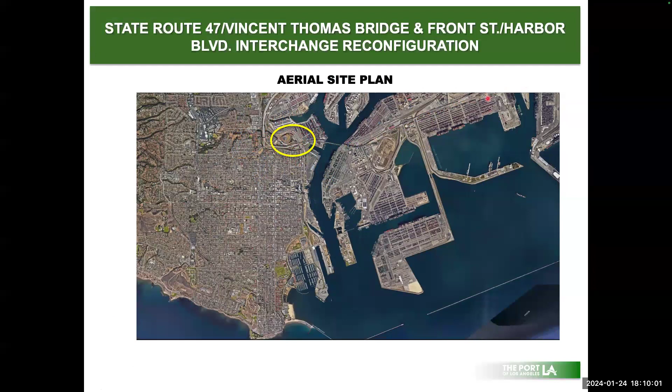So here is an aerial site plan. Let me just get my laser pointer on the project location with respect to the port complex. So just really, a 50,000-foot bird's eye view. We have the interchange here at Harbor Boulevard. This is the SR 47 that goes across to Long Beach in this area. And then we have San Pedro over here to the south.

Just to touch on some high-level improvements, as I'm sure those familiar with this interchange know, we have a lot of sight distance issues as you're coming off from Long Beach at the Harbor Boulevard exit to San Pedro. As you're coming off that off-ramp, it's kind of hard to see if vehicles are backed up. It's a quick merge as you're coming off the freeway with truck traffic coming off the 110 freeway.

So this project is essentially proposing to flip that ramp from the south side of the bridge to the north side. We'll now have a new off-ramp coming from Long Beach that'll exit on Front Street. It's a little hard to see, but we have a dual right turn, so we'll have two right turns coming off for commercial and waterfront traffic. And then we'll actually be introducing a direct exit into the West Basin Container Terminal, essentially separating truck and vehicular traffic just to add some more safety and eliminate traffic congestion in the area. So that's kind of the main improvement.

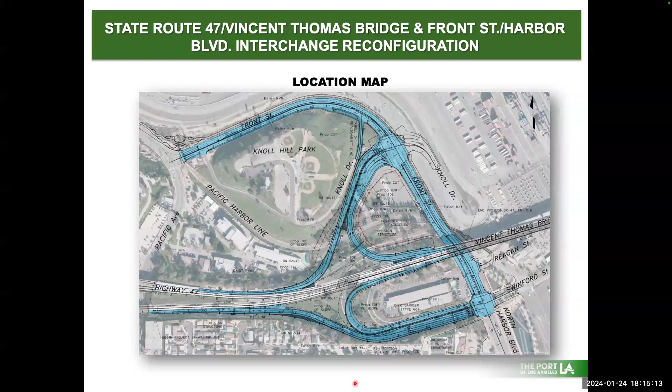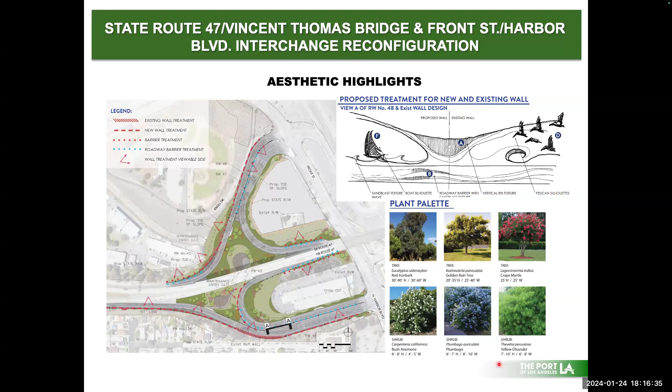And then the port will be responsible to maintain that landscape for 3 years post-construction, for plant establishment. And so now I just want to get into construction phasing.

I'm going to talk high level, just going over the 5 or 6 different stages of construction that we have. I want to emphasize the port understands the community's concerns regarding traffic detours. We plan to notify all truckers, ILWU members, community members, etc., prior to implementation of every single phase. We'll have a dedicated PR and community outreach team during construction as well.

I also want to highlight that Skanska, the contractor awarded this project, will receive their notice to proceed in March. At that time we'll have a more concrete construction schedule with more accurate dates and durations for each stage. The timeline I'm presenting today is based on our engineer's estimate that was part of design. It shouldn't differ too much, but once we have that construction schedule, we can give you some actuals in terms of timeline.

So stage 0, we anticipate this will start in spring of 2024, just in the next couple of months. There's no improvements happening to the freeway system. We do anticipate a weekend closure or two at Front and Pacific.

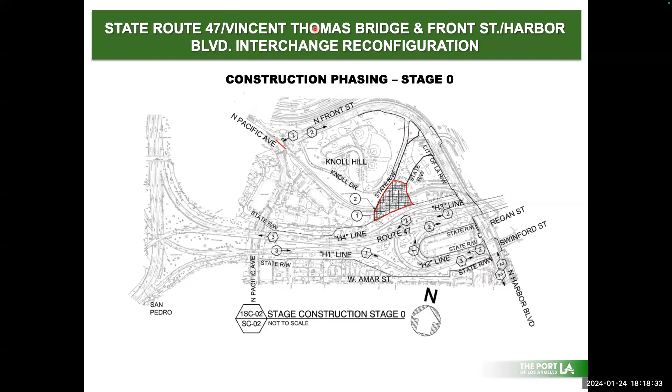And then we will switch, so the closure will be on the inside lanes while the outside lanes are available for traffic. We do anticipate some nighttime closures. We don't have those dates locked down yet, but we'll keep everybody informed.

We do anticipate a closure to a portion of Knoll Drive. We will still maintain access at all times to Knoll Hill, however we'll just be converting Knoll Drive into a 2-way traffic operation with flaggers for safety reasons. No closures to the freeway system during this stage.

Moving on to stage 2A, at this point all of the improvements north of the Vincent Thomas Bridge on Front Street are complete, including curb and gutter, street overlay, signals, street lighting, etc. So we'll see a similar traffic pattern south of the Vincent Thomas Bridge.

Closure of the outside lanes while we do construction, and we'll maintain 1 lane in each direction for the inside lanes, then we'll be switching. The same thing is happening on Swinford Street.

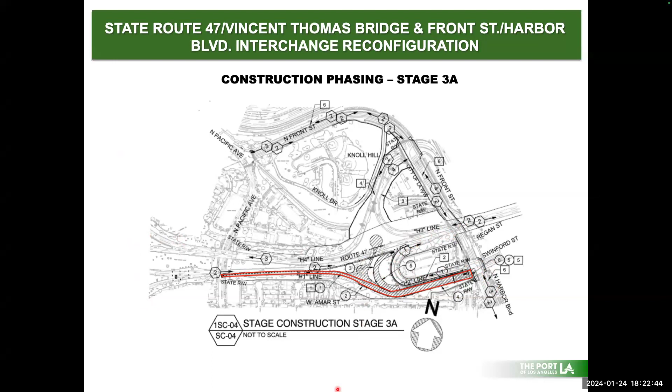I don't think I mentioned yet, but this stage will occur during winter of 2025 to spring of 2026. So late '25 to '26.

And then in summer of 2026, our last stage, 3B, we are anticipating a closure of the Harbor Boulevard on-ramp. So from San Pedro to Long Beach, again, detouring vehicles to Channel and Gaffey Street, and no other closures to the freeway system. This should be just a couple of months for this closure as well.

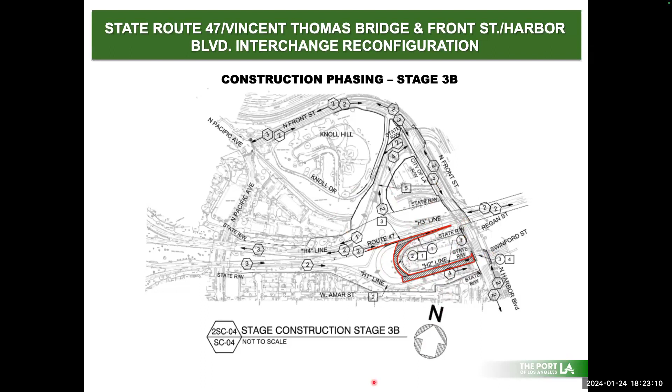So just to give some other project facts, this project is in conjunction with Caltrans, as well as several City of LA departments. We have approximately 73 million in total project grant funds, all the way from the regional to federal levels. This project was advertised July 13th.

Construction is scheduled to begin March 4th, and we'll really break ground a little bit shortly after that. This is when our construction NTP is issued, and then we have about a 3-year construction duration.

So we have conducted community outreach throughout the planning, environmental, and design phases, and we have every intention to continue doing so and ramp it up during construction as well.

We're committed to providing as much transparency and communication for the upcoming closures, as we know this impacts the local communities. We do have our partnering session with our contractor on February 21st, at which time we'll determine a groundbreaking date and go ahead and notify the community as well.

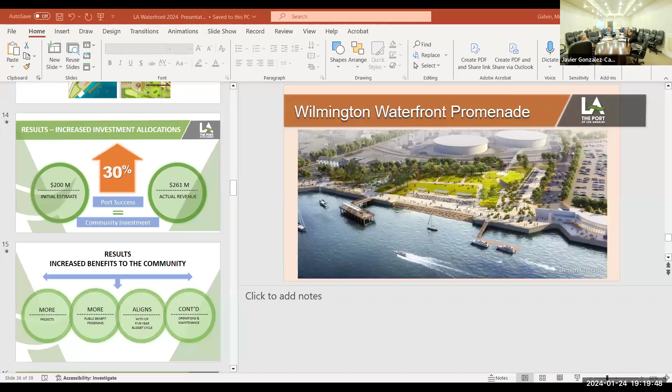So I'm gonna do LA waterfront first. I'll buzz through this, and then there's PIP in this too, but I'll go as fast as I can. I talk really fast if I need to. Whoops, got to change the cover slide.

So everybody knows what the LA waterfront is, right? This is the core of what the PIP is trying to invest in: this 450 acres and 8 miles of waterfront between Wilmington and San Pedro. There's a lot going on there, a lot of information here.

Cruise passengers are up. We have good stats on recreational vessel slips, public events, and marina access. We've done a lot of studying over the years on the LA waterfront from the Urban Land Institute, both in San Pedro and Wilmington. I think the connectivity plan in San Pedro does a really good job of looking into the entirety of the studies we've done. There are probably over 20 studies done over the last two decades looking at planning out the waterfront.

In the Port of LA, we organizationally changed how we deal with waterfront development in 2015 by creating the Waterfront and Commercial Real Estate Division, which I'm in charge of, and infrastructure investment through the Public Access Investment Plan, an event policy, waterfront commercial leasing guidelines, and the revised public access investment plan and the connectivity plan that came after that.

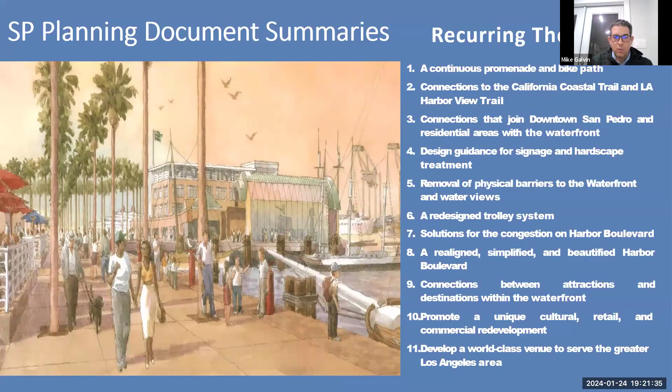So we learned a bunch of things in regards to the waterfront over the course of time with all of these studies. The focus is really on connecting downtown to the waterfront, connecting the waterfront amenities to each other, making sure it all works together. There's a lot of difficulties in developing the waterfront.

I won't go into all this, but it's probably one of the most difficult places to develop in the state of California, just with all the regulatory overlap between State Lands Commission, Coastal Commission, city, port, and different land use mixes. So we have a history of unsuccessfully privately funded projects, but we're turning the corner on that.

We're much better at what we're doing now. We understand, the port understands its position in the waterfront, and we have been at it marketing this new approach for almost 10 years. We have good success through building infrastructure, activating the waterfront, and attracting visitors and private investment.

It started with the PAIP, which I already went through: a 10-year budgetary guideline, 10% of operating income, and community input that we received. It's resulted, total of that and past development, in about $1 billion of investment since about 2004.

It's really critical to make this all work that we have private investment. So we have to furnish our leasing policies around that and understand the development life cycles. We all saw what happened with Ports of Call. That was a failure of understanding how the development needed to be reinvested in, and how the private and public agency could work with each other to make that happen. I think we've learned a lot of lessons from that, and as a result, need to proactively address market decline.

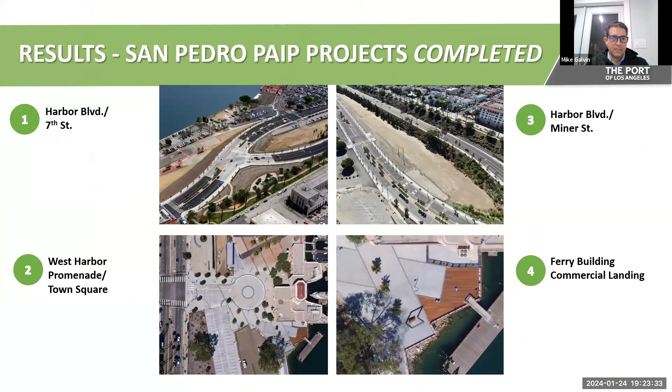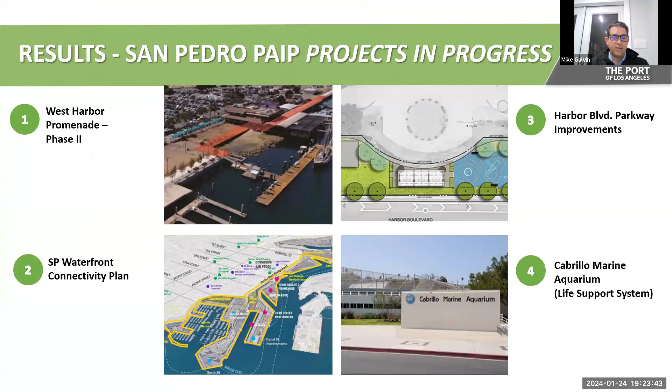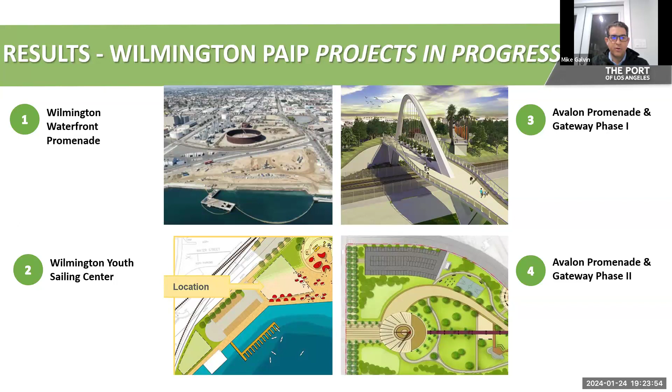So that was a big success, and it was built on the back of all of these great results that came out of PAIP. These are all projects that have been completed or are in the process of being completed as we speak now. Phase 2 of West Harbor is actively being worked forward, and the Wilmington Waterfront Promenade, Wilmington's re-access to the waterfront, will open on February 3rd, which will be a really big moment for Wilmington, getting access back to the waterfront after a century, basically.

So the public access investment plan was very successful. Started out expecting $200 million in total investment, and the results are about $261 million now, actually. So we're about 30% up from where we originally projected in 2015.

So the success of our overall business translates into success for the community. And what we get out of that is more projects, more public benefit programs, better alignment internally. So now the permanent fixture of the PAIP will line up with our 5-year budget cycle for planning capital projects, which is really important, because it is no longer a 10-year cycle. It is an ongoing program. The port will continue moving forward.

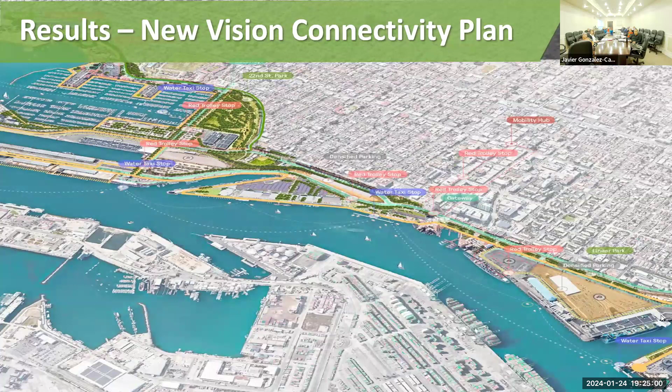And we have a new vision in San Pedro with the connectivity plan that, for those of you that have not read it, it's hard. It's 500 pages, but there are a lot of pictures. So I encourage you all to do that. There's a lot of good information in there. We have not seen this comprehensive of a deep dive into everything we've done and need to do ever. And we got really, really good value out of this.

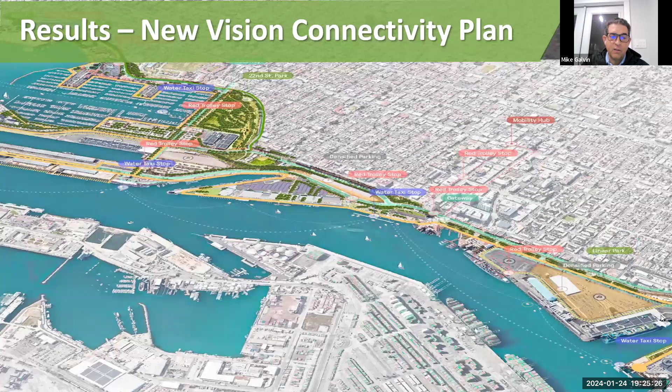I think the total that we spent was about $540,000. And I don't know how they did it for that price. Quite honestly, they did this for us because they gave us millions and millions of dollars of value through what they did. So hats off to SWA, and to those that chose them. I think some of those people are in this room and participated in the selection process. So I thank you all for making the right decision.

We have this development plan now along the San Pedro waterfront that we've been working on well before the connectivity plan, but it includes the West Harbor project, which is sort of central to everything we're doing, and AltaSea's project, which is essential as well. These are both projects that have been under lease for a long period of time, and the port has been working on delivering them along with our private partners there, and are having good success on both of those.

We have crafted the existing development there. That was really one of the first large-scale developments in the port that wasn't just a standalone commercial asset like the hotel that we have, or 22nd Street Landing.

And then we have new projects coming to market now that we've negotiated through RFPs with Cabrillo Way Marina. That one is hopefully closing this year. We're pretty close to getting to agreement on base terms for the lease there. The boat repair facility, which NOP was out, I think it was last week for that. So that's the beginning of the EIR process there. Warehouse One, we hope to start that request for information process to get the solicitation for a new developer there this year in the next 6 months.

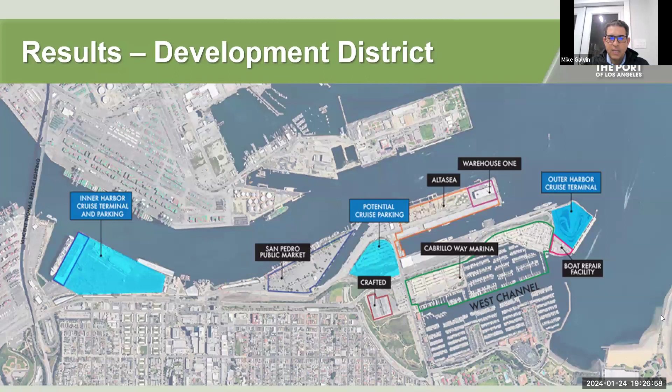And then the cruise terminal, and we're going to go into a little more detail on the cruise terminal in the next presentation. So the results of all of this is we get leveraged development. Like I said, we have a $165 million project that's being built here.

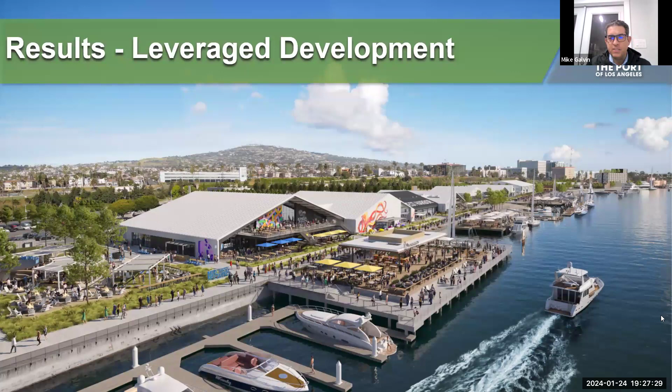$150 million of that is coming from outside financing, which doesn't happen without a good partnership, the right leasing policies, and understanding from both sides that the port is going to act correctly moving forward in accordance with our new leasing guidelines. All of these pieces were necessary, and we've been working on this for about 10 years to make sure we're in a good place to deliver.

These are the phases we talked about: phase 1A and 1B. 1A is under construction now, and that's what you see out there when you go to the site. 1B will be under construction the next couple months. 1B is adjacent to the majority of the phase 2 section of the promenade, which is where the San Pedro Fish Market used to be. Phase 1C, I think, is going to be a standalone building, probably for the fish market at this point.

Then you have North Park further to the north, which is a larger format recreation area with all types of uses. I think there's a Pig and Pickle, which is a pickleball facility with food and beverage associated with it. Park Social is a dog park that also has food and beverage, and that's all adjacent to the largest courtesy dock in Southern California.

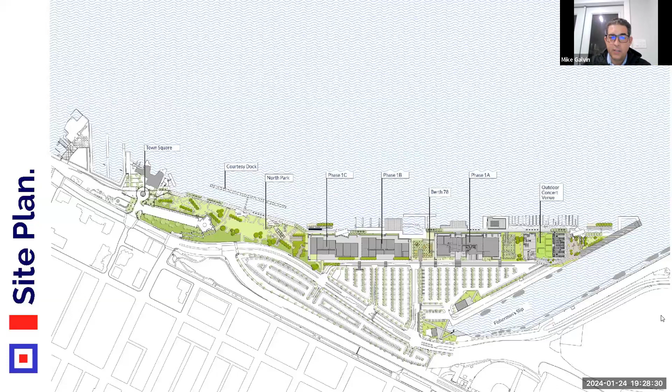They're at 1,200 linear feet using both sides. That provides access to the water that nobody else has in Southern California. So we're ripe and ready to move this forward and bring a new attraction to our community that will really draw people to the waterfront from all around the region — something you cannot find anywhere else but the Port of Los Angeles, because we are the only waterfront in Southern California adjacent to the largest shipping port in the country, on the main channel of that shipping port. Nobody else has that.

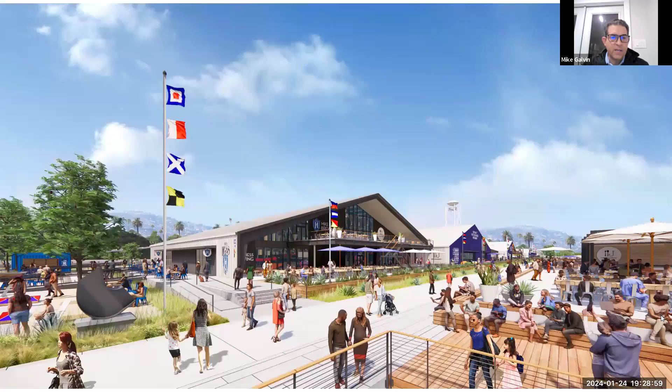So these are just some views of the development — there's Park Social, and AltaSea. AltaSea wants to be the center of the blue economy here in Southern California for the West Coast, and they're focused on adaptively reusing the first 180,000 square feet of warehouses you see in the middle of the screen. They're well on their way through that project, building out this blue business hub.

The opportunity there will begin when they open the first phase, which I believe is berth 58 — May 20th, I think, is the date I've heard for that opening. So they're making good progress there. They're in about a $27 million total development or redevelopment of those warehouses, and Swinnerton Contractors is their construction contractor for that first large piece they're working on right now.

They're having very good success with tenants, and we'll have some big announcements coming up on tenants that are big institutions locally and within the region, which will provide more security for AltaSea as they move forward with their mission to become that blue economy center in Southern California and beyond.

These are just different pieces of what it's going to look like between berth 58 and berth 57 — this open space between the warehouses. They'll also be looking this year at developing a plan for berth 70-71, the main channel, former Westway site, on the east side of the existing buildings being built right now.

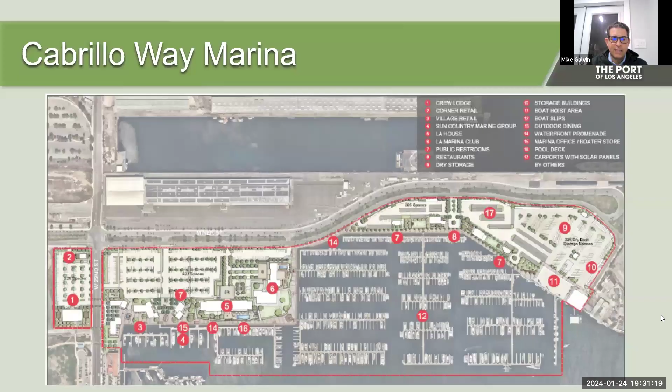Cabrillo Way Marina, as I mentioned, is under lease negotiations right now. Their plan is to build out a multifaceted landside development. They will take over the port's Cabrillo Way Marina, purchasing it from the port subject to a land lease. They're planning on building two hotels, one north of 22nd Street and one south of 22nd Street — the large hotel will be south of 22nd Street, about a 150-unit hotel. They're also building in the center there.

You see to the rear a little bit what we call a marina club — a food and beverage facility that's basically allowed for anybody that has a slip in that marina to utilize, similar to what a yacht club would be, but not exclusive.

So that will provide food and beverage, I believe, to the public as well there.

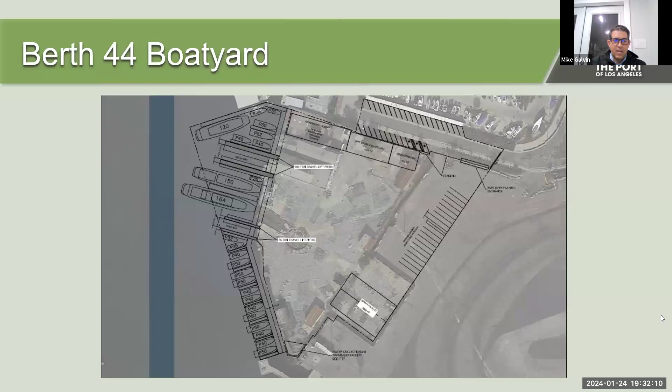The Berth 44 boatyard I mentioned is going through the environmental impact report right now. This site needs to be cleaned up too from the past legacy operator, San Pedro Boat Works. Once we're done with the EIR certification process, we'll move on to remediating the site and then development. That site can service 99% of the recreational boats registered in the state of California, along with commercial vessels.

Then the Outer Harbor Cruise Terminal, I'll get to that in a second. Warehouse 1 is 460,000 square feet of warehouse space, one of the most unique buildings architecturally in the LA region, something many developers have their eyes on as a jewel that can be developed further as the rest of the waterfront develops around it. But it's an extremely expensive development in a historic landmark building, with a lot of cost and red tape to get through. So we plan on working closely with State Lands to open up the use scenario to as many possible uses as would make sense to make this a viable real estate development.

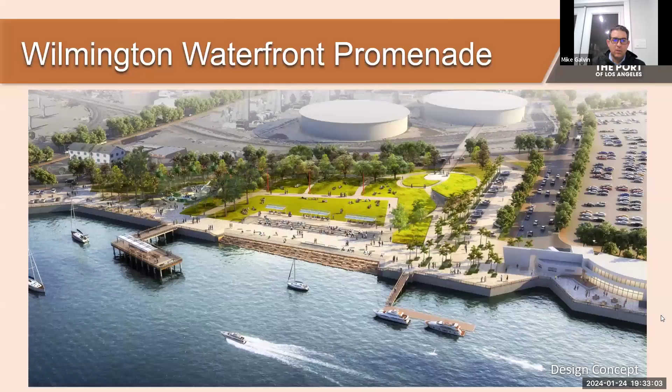In Wilmington, we have big things going on, two big parks. The initial park will basically be complete and open in a couple of weeks on February 3rd. There'll be a big event there, the Lunar New Year event, at 1 o'clock on Saturday, February 3rd. So that'll be both the opening of the park and that annual event for the port.

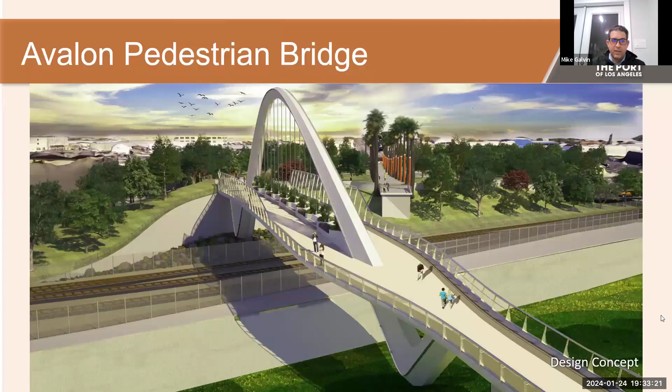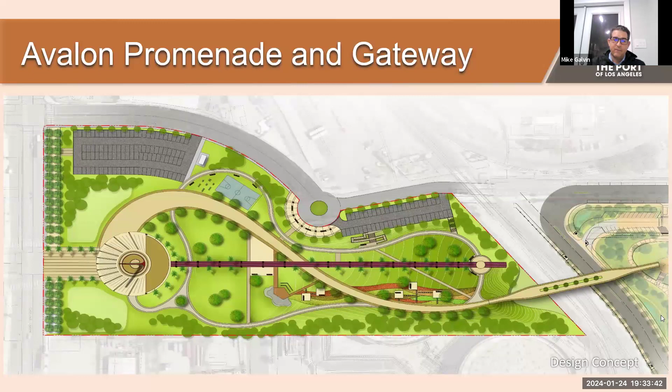The next phase is building the bridge across the railroad and the relocated Water Street to connect up into the Avalon Promenade Gateway, which will eventually be the gateway from the bottom of the Avalon corridor at Harry Bridges into the waterfront area. This is all expected to be delivered by 2027, and it's going out to bid this year for construction. So that is the end of the general waterfront.

If we have time and everybody wishes, I will go into the cruise terminal RFP information.

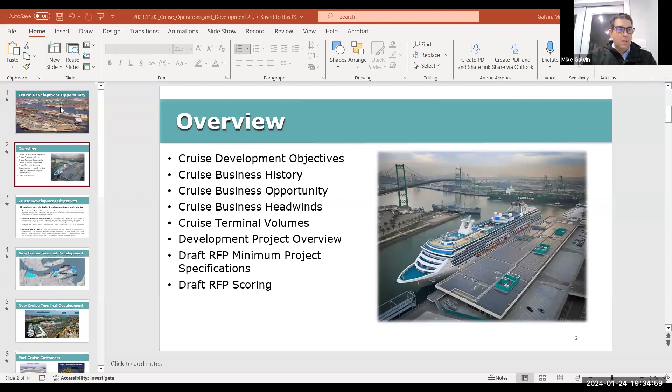Okay, so the cruise development, everyone can see that, I assume? Yep. Okay, cruise development opportunity.

This is really core to allowing us to build our cruise business. I'm going to go through the objectives, cruise business history, business opportunity, headwinds, terminal volumes, development project overview, RFP, minimum project specs, and draft scoring.

So the objective: we want to maintain and build our market share. We've spent a long time building our market. COVID took a hit out of it, but we are back and recovered, operating at double what we did before COVID. We'll have a little bit of a hiccup this year because we have some boats going into dry dock, but we'll rebound next year and be at record levels again. So we're excited, but we have to be smart about moving forward.

This is a business that has been very transient over the years, so we want to improve the financial performance of the cruise business as we offer this request for proposal out for development of the cruise business. We also want to optimize our land, getting the best use out of both the Inner Harbor Cruise Terminal

and even better use out of the Outer Harbor, which is a unique facility at the Port of LA, because nobody else on the West Coast really has a facility that can accommodate one, much less two berths, that can take on these very large cruise ships, 4,000 to 5,000 plus passengers, in deep enough water, in a location close to a huge population base. So we're really well positioned to catch this cruise business that is growing and wants to continue to grow on the West Coast.

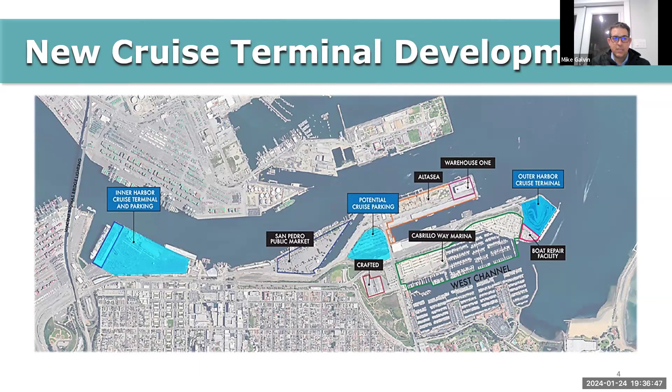While there may be continual growth in down-run destinations in Mexico, including a mid-Baja destination that could really increase cruise activity, what we're looking at here is the existing cruise terminal. Berth 93 has been our bread-and-butter terminal for a long period of time, but it's basically being outgrown by most of the ships that call here today.

We squeeze a large Princess ship in there today, but it's a squeeze. The captains would rather have that ship going somewhere else. Our only really large berth that is usable right now is berth 91, 92, and that can accommodate ships with 4,000 plus passengers. Berths 46 and 50 are both not adequate right now for larger ships due to different issues.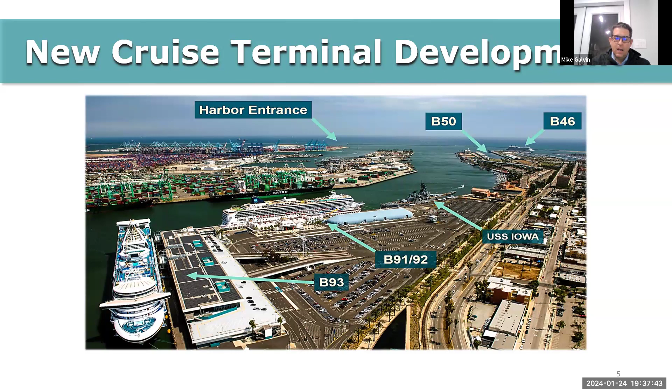We're working on berth 50 to deal with some of those issues so that we can deliver that for use prior to the RFP process and lease development deal being complete, so we don't miss any opportunity in the meantime. But that's the run of our business.

Our lines that service us: Princess Cruises has been home based here for decades and decades, and continues to be the main player here. Royal Caribbean has been here, has left, has come back. They are a big growth player in our business right now, and Norwegian has been here for a long period of time as well, and has come back more recently.

Royal is the one that is currently offering year-round cruising, which is important to sustain the business throughout the summer, so we don't lose all that business going forward.

Cruise lines learned in the 2018 to 19 range that if they put better ships here, they would increase their yields, and that's what the cruise lines care about, their yield per passenger. Upstream from us, Alaska is the highest yield per passenger, I think, in the world. And downstream, historically, the West Coast of Mexico has been one of the lowest. So we're improving on that because better ships came into the marketplace, and the cruise customers have reacted well to that. They're getting on ships in droves.

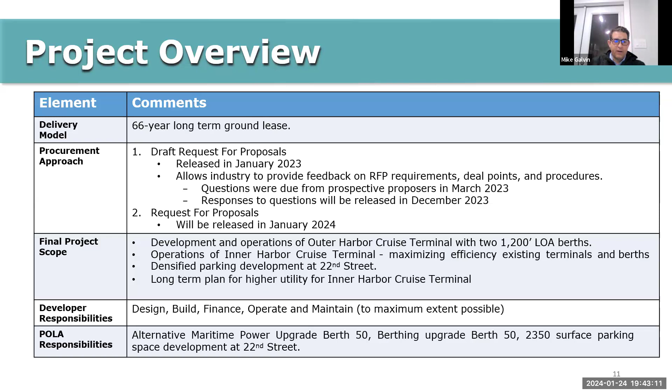POLA will be building out AMP at berth 50, and that should be done by 2027. We're upgrading berth 50 as well, so it can handle larger ships. And then we are working on a 2,350 space surface parking development at 22nd Street.

Technical specifications, this is what we're focused on. We want to get a minimum of 4 berths, 2 in the inner, 2 in the outer, really 3 big berths. We'll be focused on phase 1 and phase 2, berth 50 development of the land side after we've built out some of the water side, maybe expansion of the water side. Phase 2, berth 46, full land and water side development, expanding that berth to handle much larger vessels, and optional future development, as I mentioned, the inner harbor, land and water side, and densified parking at the inner and outer harbor.

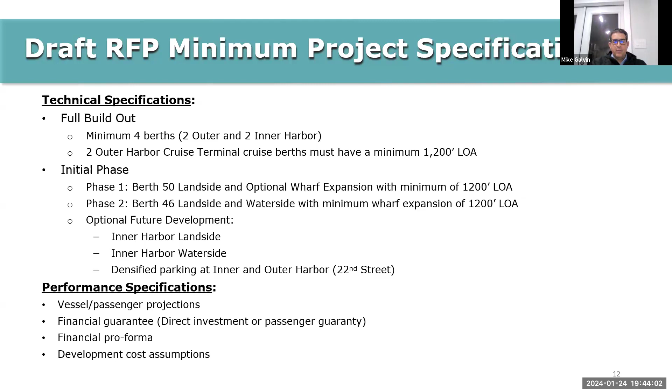Performance specifications, we're focused on what the entity that is going to be proposing can deliver in regards to business - passengers, their financial guarantee, their pro forma, and how they plan on making this development work financially over time, and the development cost assumptions. Those will all be important. These are all scoring methodologies for how we're going to look at the proposals that come in: qualifications and experience, development approach, operating approach, minimum passenger guarantee or minimum base ground rent, and the financial proposal, including projected passengers and the validity of those projections.

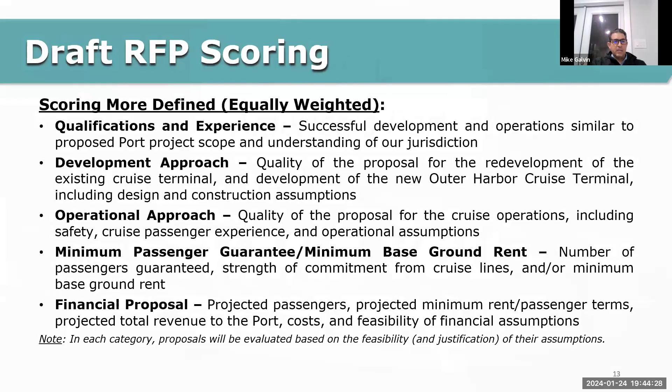So that's all I have on cruise. I hope I didn't go too fast or too slow. Thank you, Mike. Happy to answer any questions.

No, thank you. That was great. Next question. Yeah, I think so. Pat.

Mike, the cruise lines advertise this place as an escape to Shangri-La or to some other place you can go for a vacation and a nice experience. San Pedro is definitely not their destination. No, and there's not very much, there's nothing much in this proposal that looks like tying the cruise lines to San Pedro or a San Pedro experience, whether it's West Harbor or anything else. You mentioned some things about the 80,000 square foot development sites down in the outer harbor.